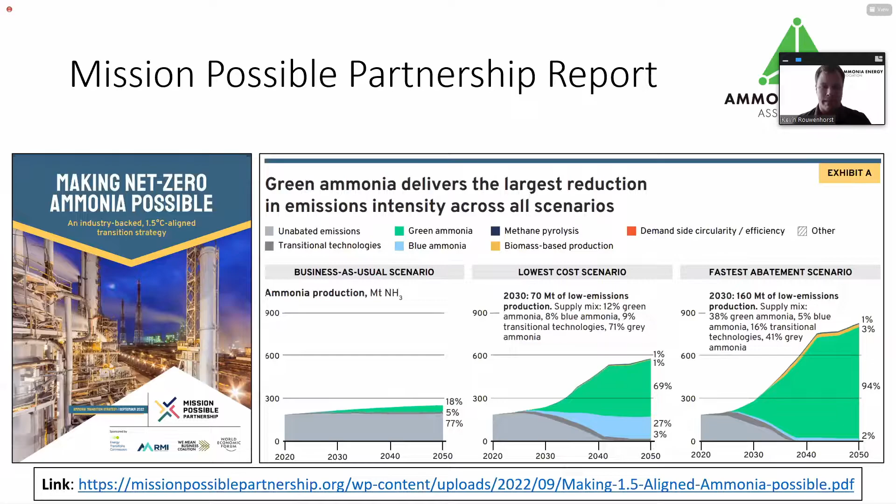Next slide, please. Right now the renewable ammonia part will be quite small, but on the long term it will be large.

At the Ammonia Energy Association, we looked at the announced capacity for low carbon ammonia production needed to meet demand on the long term. New markets are popping up—not only current markets like fertilizer or chemicals production, but also shipping, the maritime sector, stationary power generation, or ammonia as a hydrogen carrier.

This graph shows all announced and existing low carbon ammonia production capacity. Interestingly, about 150 million tons of low carbon ammonia production is already announced. Part of that is fossil-based ammonia production with carbon mitigation, currently mainly CCU or enhanced oil recovery, about 4 million tons of annual production. By 2030, this fossil-based production will be about 15 million tons, mainly CCS.

More interestingly, if you look at renewable ammonia production, even more is announced to serve new markets or existing markets such as fertilizers, as we will hear later today. By 2030, it's estimated that around 55 million tons of renewable ammonia will be in production. The question is how much of that will be realized, but it shows a substantial move towards renewable ammonia.

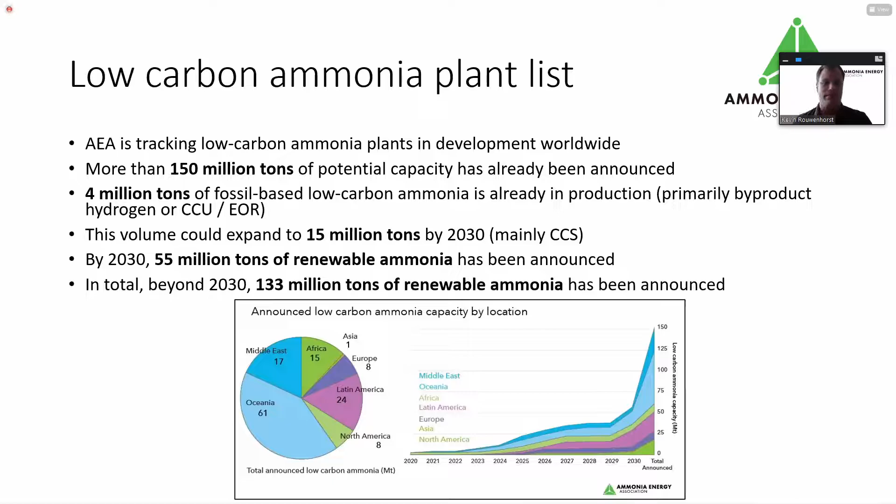Thank you very much, Kevin. This presentation already looks quite interesting with all the projects of green ammonia coming. I think we're kind of proud that Fertiberia is one of the first companies that actually produces, and plans to produce, green ammonia in Puertollano.

This is a bit how it looks—this is our site in Puertollano in Spain, an hour by train from Madrid. It's a very nice place, and usually it's more sunny than in this picture. If you go to the next slide, please.

Fertiberia is not the biggest company, but we are a reasonably sized company with 1,500 to 1,600 employees working in the fertilizer business. More importantly, we have more than 40 years of experience producing ammonia on the site. You see a lot of announcements of green ammonia projects, but it helps if you know what ammonia is about and how it differs from many other chemicals.

We use ammonia to produce fertilizers, and fertilizers are an important factor in greenhouse gas emissions. We want to reduce it, and we're going to do it. That's the main reason Puertollano is our first site—together with Iberdrola, we managed in a short term to make this first full-scale production of green ammonia and green hydrogen available, an important step in learning how to make green products work, including certification aspects. Being first means developing new rules, and it's an important step toward fully decarbonized production.

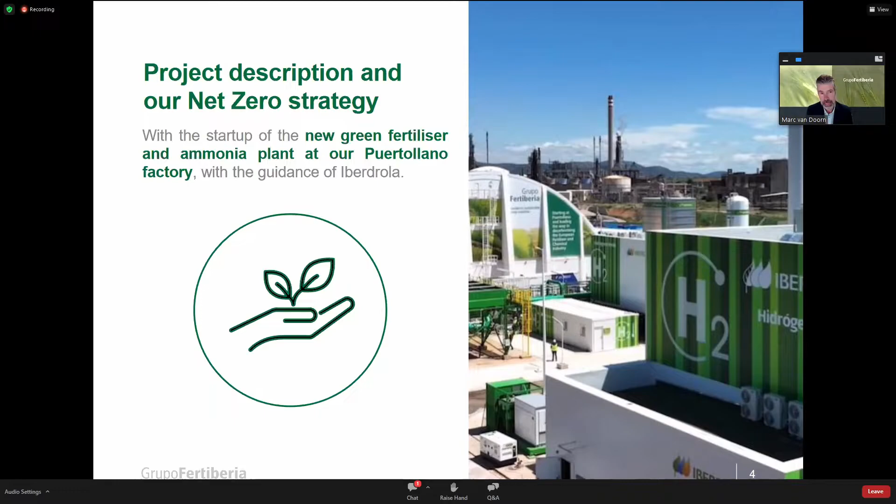The plant in Puertollano is our kilometer zero plant. It's not a future project or something still coming—it's running right now, producing hydrogen at the right place. It's connected to a solar field producing renewable power, and we're running a lot of tests to produce hydrogen and feed it into our ammonia plant, a few hundred meters south of this site.

Iberdrola is our partner producing this hydrogen and has installed the renewable assets.

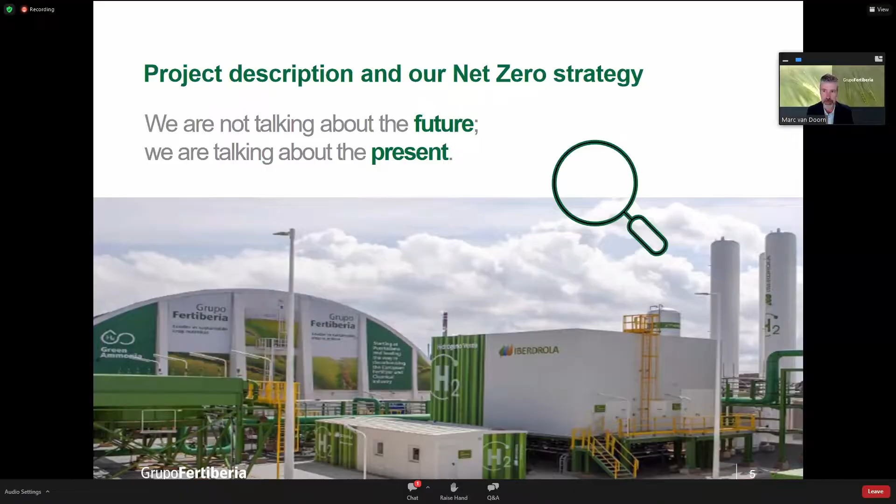Now we can switch to a film we built on site, which is a nice representation of how it actually looks and how it was built up.

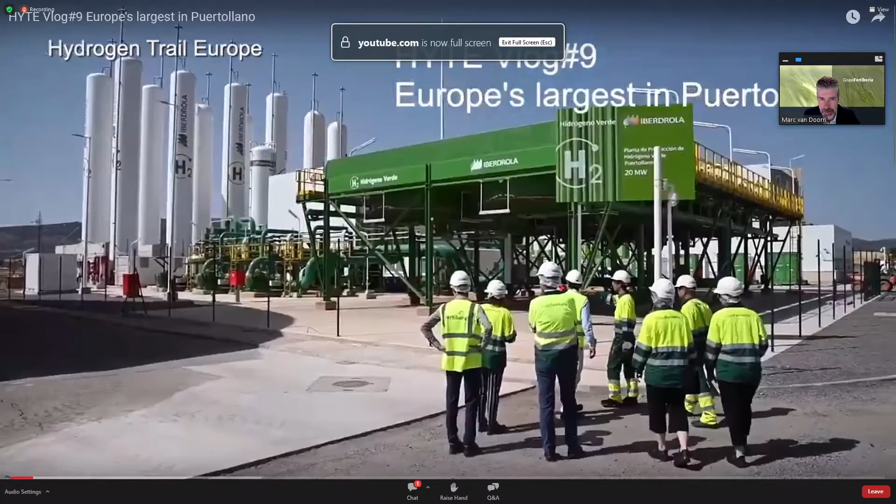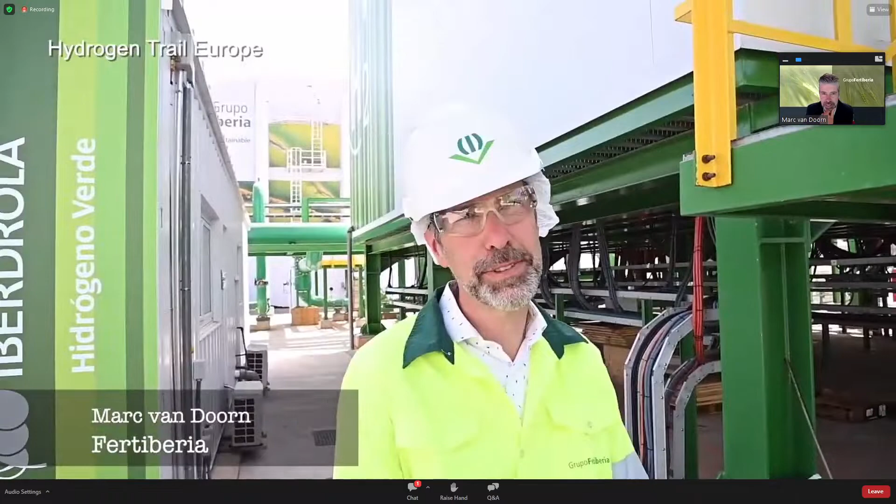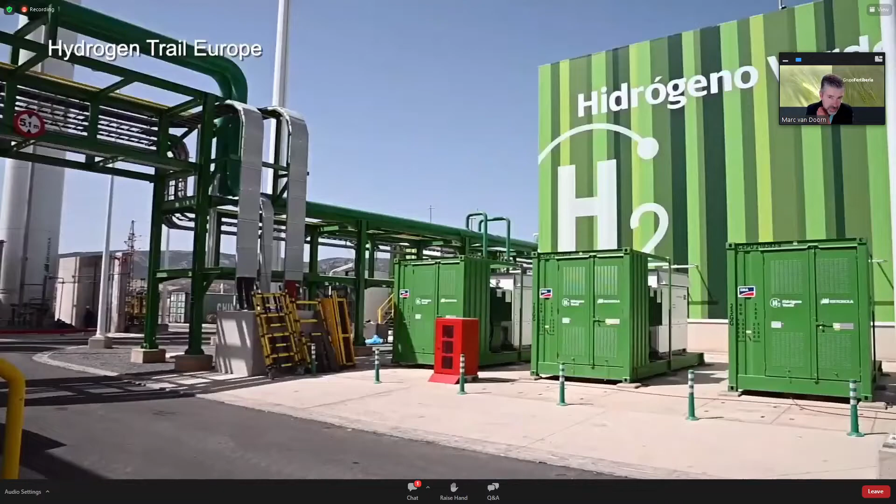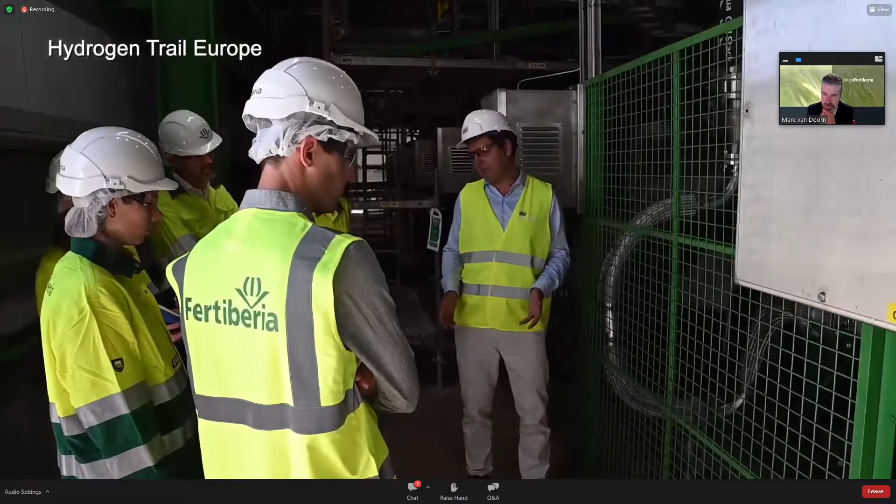We're here at the Puertollano site of Fertiberia, the first green ammonia production based on green hydrogen produced by Iberdrola on this site. What you see here is everything needed for a 20 megawatt hydrogen production. It starts with power coming in from the solar field, 8 kilometers away, fed via cable to the rectifiers on the other side, then the power goes inside the electrolyzer building, where there are 16 units of 1.25 megawatt PEM electrolyzers. Together they total 20 megawatts. This hydrogen then goes via a compressor to the storage area, which contains 11 of these cigars that hold the hydrogen.

We need quite some storage here because we operate this hydrogen with an ammonia plant currently also run on natural gas. We combine both, since we need a constant flow of hydrogen into the plant. Since the power comes from a solar plant, it's going to be dark at night, so we need buffer storage—this is quite an extensive storage to cover us through the night.

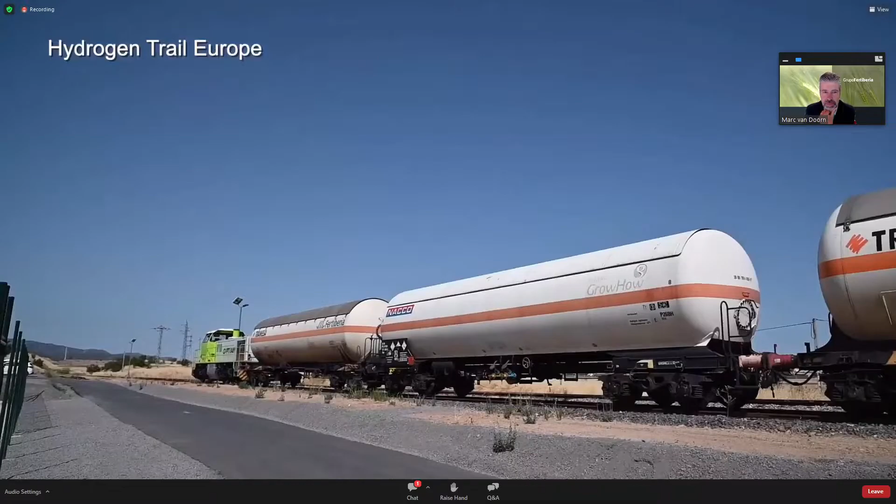Of course, 20 megawatts is just a beginning, and we learn a lot from doing it here. For that you need constant hydrogen use, so you can only do that at a site where you already produce ammonia. Then you have two choices, and we have good cooperation with Iberdrola at both sites where we produce ammonia—this is Puertollano, and Palos is the other one in Spain. We started here because this gave the best principles, and also the solar field here was the earliest available.

At the moment we are standing next to the biggest green hydrogen electrolyzer in Europe—and it's also the first green ammonia production and green fertilizer production in the world.

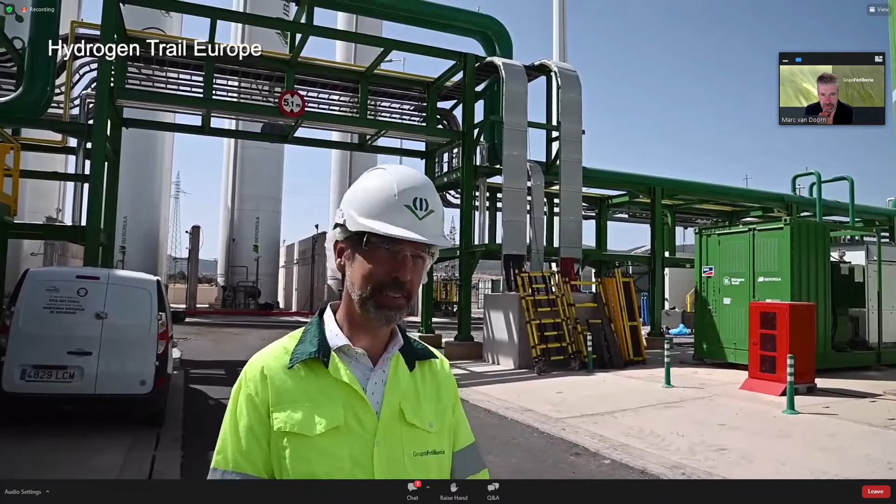Do you think that's the future? Yes, green ammonia is definitely the future. Looking ahead, you will have dedicated green ammonia factories. This is a hybrid factory—excellent for learning all the tricks needed to handle this hydrogen, handle it under pressure, and how to make ammonia with it. It gives us great learning. So my advice to everybody is to start small and not think in gigawatts from the beginning—you can build this up.

The next step will be the extension of the projects here in Puertollano and Palos, but also fully 100% green ammonia plants.

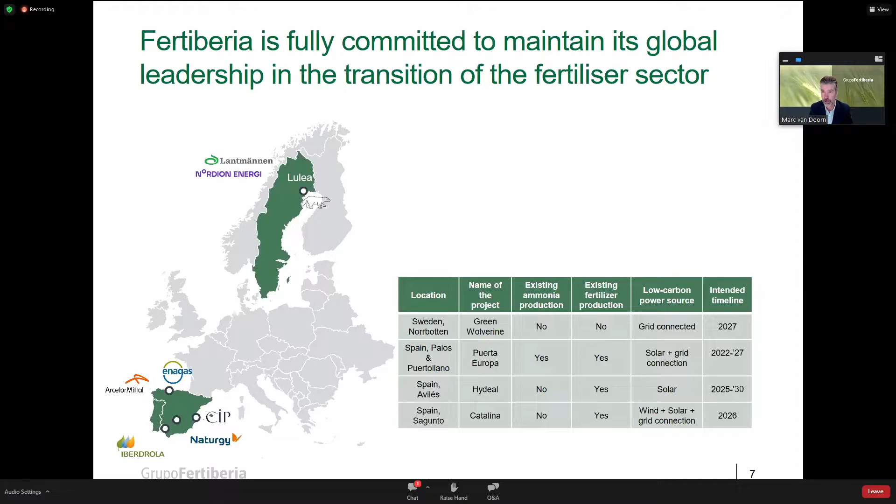And with these projects, we definitely are capable of replacing all the ammonia that we need with green ammonia, and have a surplus in a number of years.

Next slide is the last. Thank you very much for looking. I'm available for questions, but I let Kevin manage that, and then looking forward to fill in all the promises that we made and become a net zero company in 2035.

Thank you so much, Marc. That was very enlightening, and also very nice to see how you're actually already doing this renewable ammonia production, and the timeline is actually quite short. We have like 13 years from now to get to net zero from your side, so that's really great.

So our company is a company of Norway. We have our headquarters in Oslo, and we are a leading hydrogen technology company, specialized in two business units: electrolyzers, water electrolyzers, and hydrogen fuel stations. For the water electrolyzers, we have two technologies. As you can see here in this slide, we are in the middle of the connection of the renewables and utilities with the use of green hydrogen in industrial applications. We are in this intermediate phase that is important to make this new hydrogen market grow in the next years.

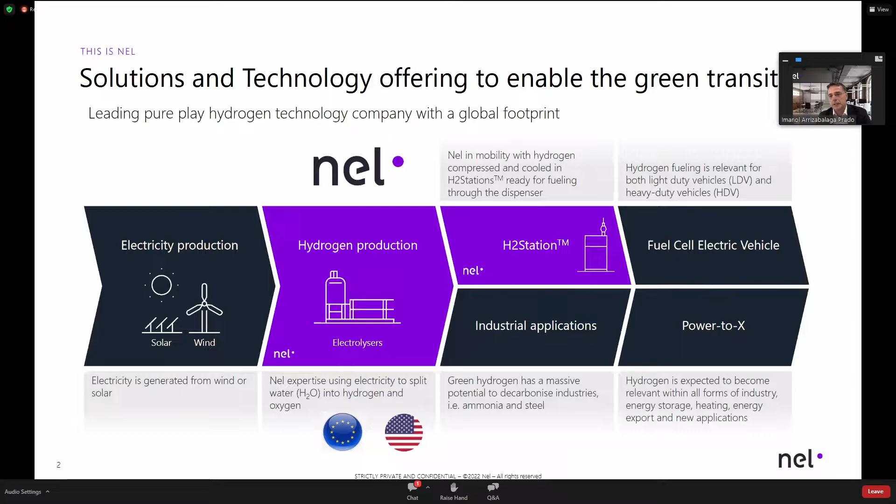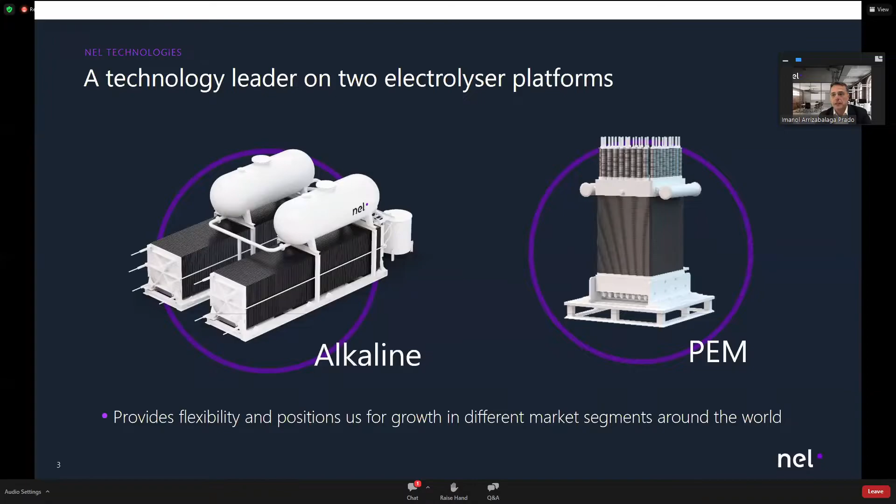We have two technologies, and in fact, in our group, we have two main factories. One factory in Norway for the alkaline electrolyzer technology, and also another important factory we have in the United States related to the PEM technology, proton exchange membrane technology of electrolyzers. In both technologies, we are growing in production capacity, but also in new developments and new improvements in the designs and installations.

Our company is special because in the same group we have the two main technologies of electrolyzers, and we work in different ranges of production, from small electrolyzer systems for testing and industrial use, to medium size that could go up to 20 megawatts, and also larger scale that is up to 100 and even bigger than 100, hundreds of megawatts. The renewable market is moving in that direction, to larger scales, taking advantage of the renewable feed. We are also being prepared to attend larger and larger projects. But having said that, we also maintain our product portfolio in all the different sizes of projects.

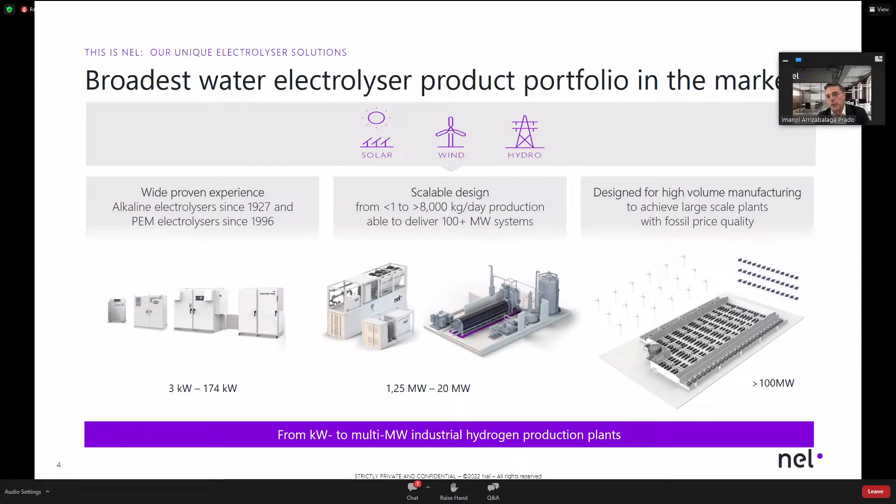I will explain how we look at the market and what applications and opportunities we see in this new green hydrogen market.

In fact, our company was established 90 years ago in Norway. So we joke that we are an old startup company, because our company is old, but we are like a startup in a new phase because of how mature renewable energy is becoming, and how industrial applications and different sectors can be decarbonized. This is what is happening.

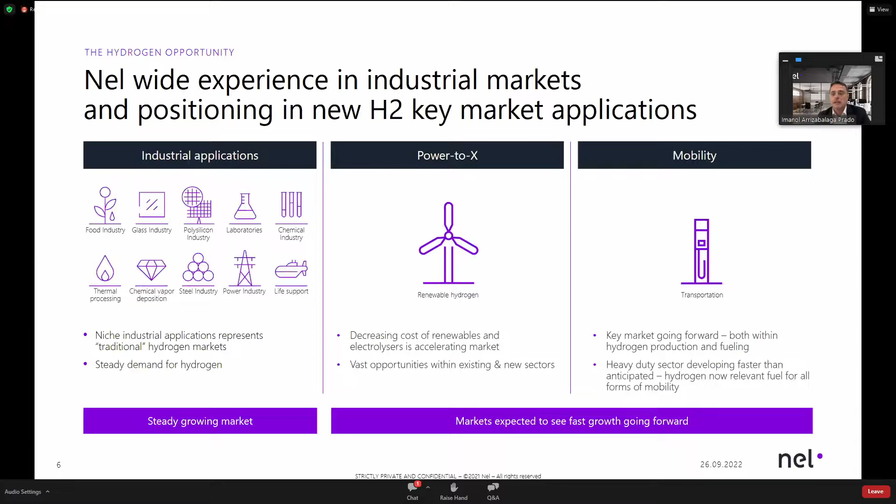We know the technology, but we need to increase production and scale. We have experience in different sectors, including fertilizer, semiconductors, chemical industry, and the steel industry. So the sectors are there. The difference today and in the future is how renewable energy will be able to replace natural gas, and how hydrogen will be used as an energy carrier or as a raw material for industrial processes.

At the end, we are not a new company. We have delivered thousands of electrolyzers in different sizes. As you can see in the old photograph, 80 or 90 years ago our company already developed large green ammonia electrolyzer projects, at that time with Norsk Hydro, taking advantage of hydropower in Norway. That type of production was already designed and installed. The difference with today is that going to industrial scale requires more automated production to reach larger output. But the technology is there.

We need to improve different sectors and parameters, but the knowledge is there. We have experience in the chemical sector, semiconductors, and mining. Recently we are also obtaining orders for electrolyzers for the steel sector, to decarbonize it, and we have activity in Australia. So as you can see, our company is not new. We have this experience that is the base for our new growth.

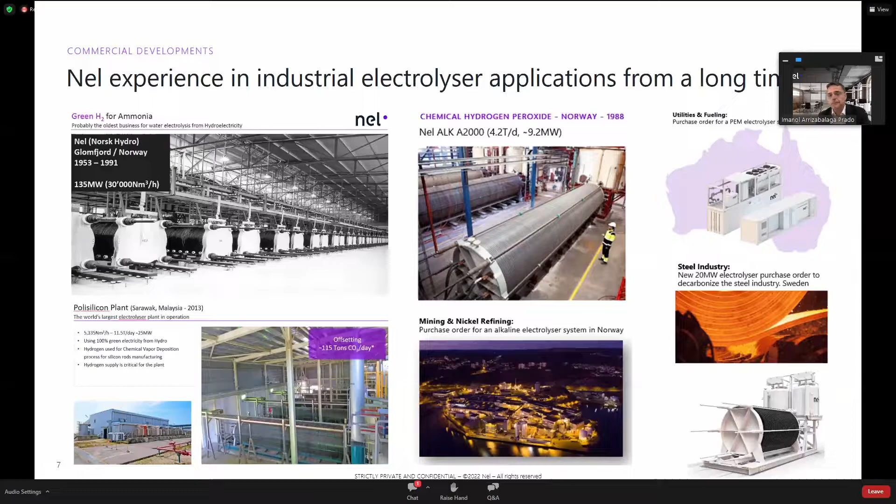What is happening today is that projects are moving to a larger scale for different industrial applications, including green ammonia. We are preparing our company for these large projects in both technologies, alkaline and PEM. We have research and development projects, and we also have standardization. What is important when you go to large scale is to standardize your solutions in order to reduce risk for clients and for installation on site. That is what we are developing, this industrialization. We are preparing our production facilities for this large scale, and that is currently our focus. We are growing as a company, incorporating more and more engineers and employees.

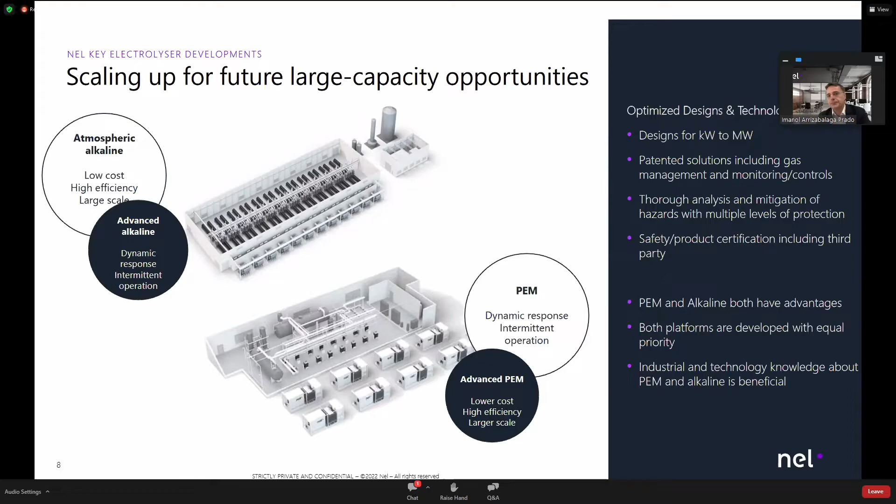The green hydrogen market is moving so quickly, with support from the European Union and from the administration in the United States. The needs and demand of the market are there, but supply and demand are not yet balanced. Companies like us don't yet have the capacity to attend all the projects that could come in the future. But our company, NEL, has a leading position because we already have a fully automated production line of 500 megawatts per year. Because of recent movements in the market and recent contracts we have been awarded, that gives us the leverage and support to invest in more production capacity. We cannot invest in bigger capacity if there is no support from clients or real projects, so we have to be cautious, but we are investing in production capacity at the same time that clients are committing to work with us.

By 2024, we will have a second production line installed, giving us a real automated production capacity of 1 gigawatt. Depending on how the market evolves, our plans could be even more ambitious. Our company will keep growing to accompany our clients and partners.

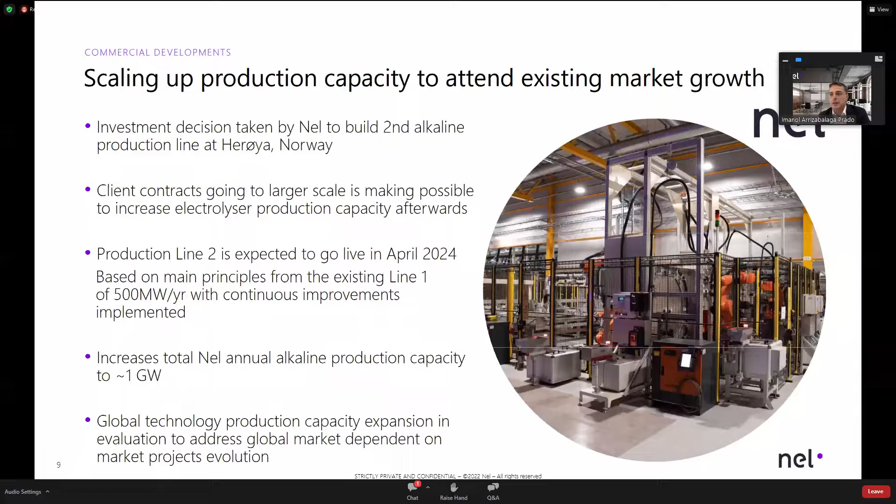I will talk now about the Iberdrola and Puertollano project, but also how the market is moving. This is recent, from some months ago. This is an interesting project because it's a pilot project to demonstrate renewable energy fluctuation to produce green ammonia in the synthesis reactor that one company, in this case Topsoe from Denmark, will install after our electrolyzer unit. So it will be a complete demonstration line of renewable green electrolyzers and green ammonia production, and there will be a lot of learnings from this project that later will go to industrial large scale. So this is happening now.

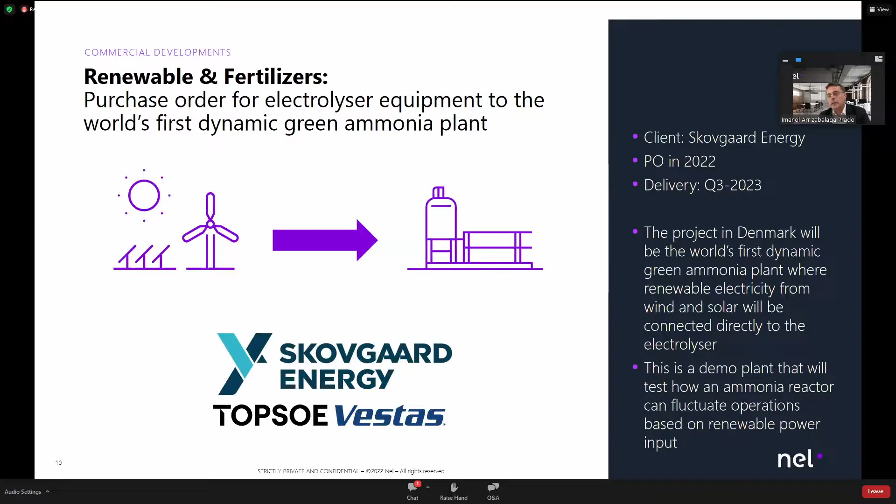And of course, in the next one, this is the Puertollano project of Iberdrola. Iberdrola is an important company, one of the leading renewable energy companies in the world. This is one of the biggest and most important in this sector.

They were pioneers. This company, Iberdrola, is in the front line of the green energy market because they started many decades ago with wind energy. They entered photovoltaic solar projects, but now we have the same vision - this important company, client and partner, Iberdrola - to decarbonize the society, to decarbonize the industry, and to implement, use and help the green transition in our society and in our industries.

So we are accompanying this company, Iberdrola, in the project of Puertollano. It was an honor for us, for Nel, to be considered and selected by Iberdrola for this project.

Iberdrola selected the PEM technology in this case. As I mentioned, we have different and several options of technologies, alkaline and PEM, and in this case, depending on the project specifics, it was decided to consider the PEM technology.

And this project is still in tuning, in trials and in operation, in prudent steps. It's a complex project. And what we are doing now is - and I can explain you how the system works.

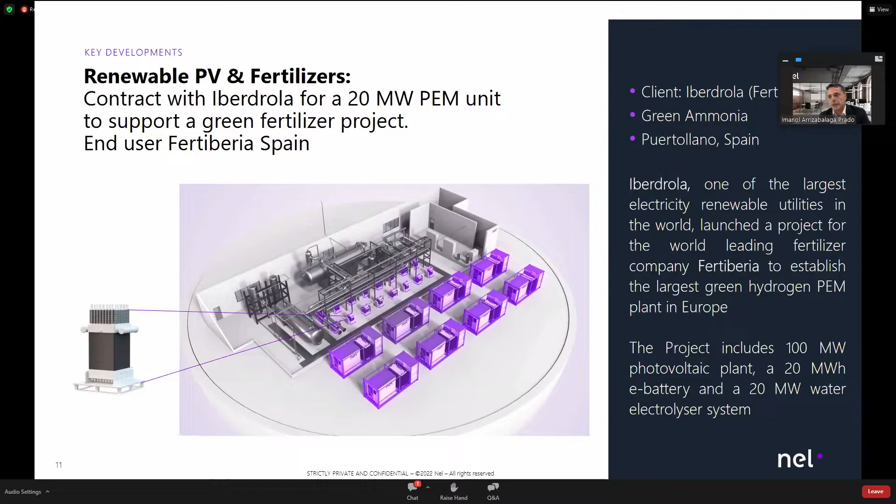But let me explain you in the next one - and this is just to finish, so you can see also more information of our company on our webpage. But now we can see a short video of how our technology looks like.

Thank you, Imanol. And the video will be starting soon, I guess.

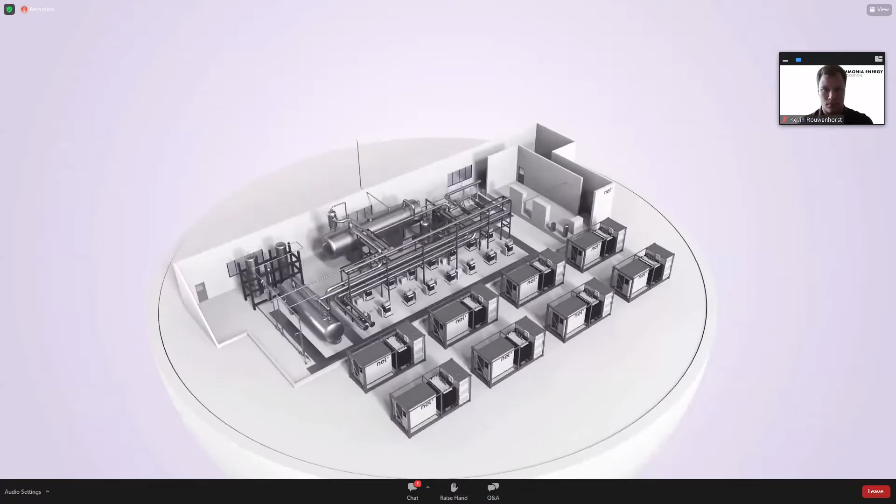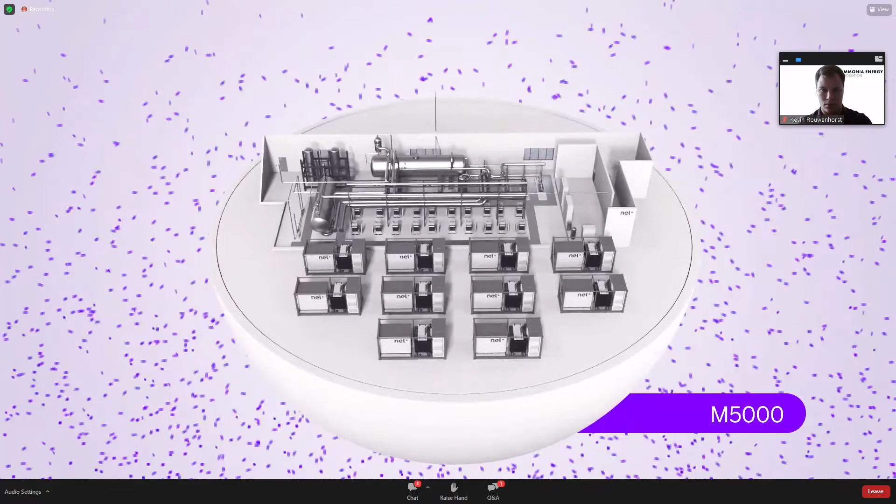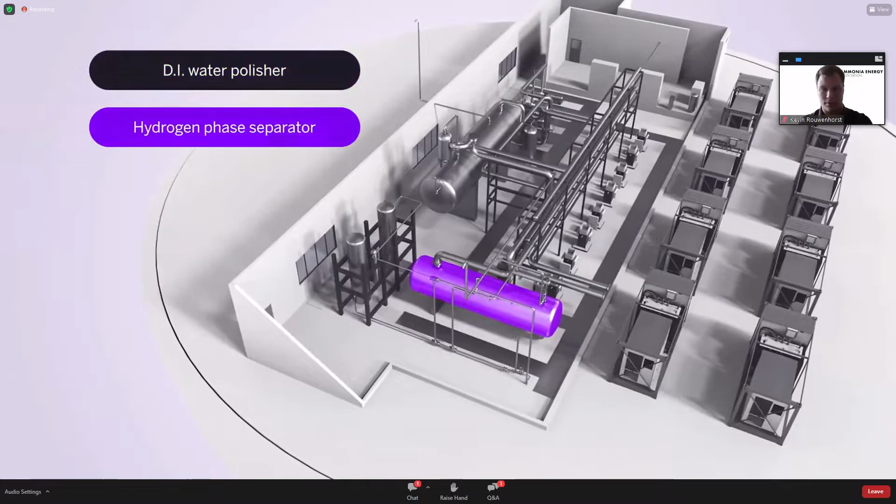Nel, the leader in on-site hydrogen generation, is taking our M-series PEM electrolyzers to the next level for high-volume hydrogen customers. Our M-series electrolyzers are based on standard and proven cell stack and power supply modules, aggregated into a compact and cost-effective balance of plant. Ranging from the M2000, producing over 4 metric tons per day of hydrogen, to the M5000, producing over 10 metric tons per day, the M-series plant design provides modularity without excessive redundancy. Oxygen phase separator, heat exchanger, water circulation pumps, electrolysis cell stacks, DI water polisher, hydrogen phase separator, hydrogen dryer - and it all comes with the proven attributes of Nel's PEM electrolyzer technology, including low maintenance, safety by design, and decades of reliability.

All right, so thank you for that, and thank you, Imanol, for the very nice presentation. And you know, the most interesting thing is that we move from these nice videos to actually a plant that is running with these nice units. I think the biggest takeaway here is that there's actually a plant running on these units, and they exist. So that's really great.

And I wanted to go for our first question to Mark. So what were actually the drivers for this project to be first of a kind? There's probably a lot of risk involved in being first of a kind, so what were the key drivers? Is it the off-takers, the government, or is it mainly internal wishes?

Well, it's important to learn, to start, and to work away the issues once you're doing it, because you can think big, but it's not so easy to work big. So the Puertollano site was an excellent site because of its solar capacity and the fact that we already have the capability to absorb the hydrogen being produced. We're not dependent on a hydrogen market that needs to develop for transport, so we could actually use the hydrogen at scale and start producing the green ammonia.